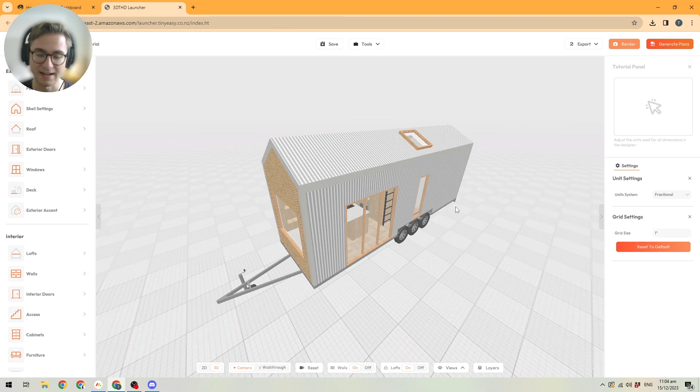You can manage your account here, and you will find design settings. So for example, design settings will help you if you are in a design that's designed in the metric system, but you want to change the project over to an imperial system. You can go into the unit system here, and you can choose between millimeters, centimeters, meters, inches, feet, and fractional.

As a quick tip, the fractional system is inches and feet combined, so you can type in, let's say, 1 foot, 1 inch, and a quarter or something like that together. I'm going to leave it at fractional for now, because we are already using an imperial design here.

And then you have the preference settings here, and you will find the UI preferences and the save preferences. With the UI preferences, if you are on a small screen, this will be your friend. Let's say you have loaded the design and you think your interface is quite small. You can go in here and change the page zoom to make the software bigger. So the buttons and all of the interface will get bigger, so it's easier for you to see.

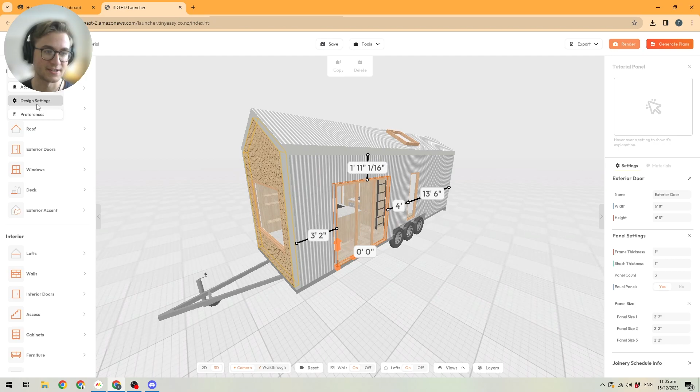The 3D dimensions and 2D dimensions can be changed here as well, so I'll just quickly show you what those are. In this case here you can see the 3D dimensions popping up around an object. You can change the size of this to fit your screen size. I like keeping this myself at around 120%, because I have a larger screen, so it's easier for me to see. And the 2D dimensions are the dimensions that pop up when you are in the 2D view, and I will get into the view in a second.

So that's the preferences. The next part of the top bar here, you will see the license. I'm currently in the business version, but if you're on a trial or in the personal version, you will see that up here. Here you will see the name of your design that you've currently loaded. And this is the save button, the most important button that you will be using a lot to make sure that you don't lose your progress.

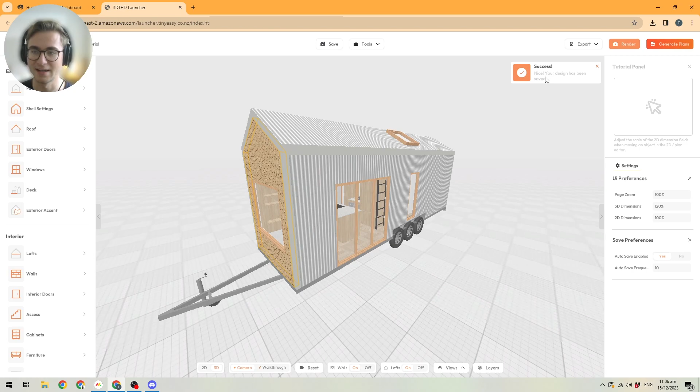You just click the save button here, and you will see a notification pop up that your design has been saved. We also have autosave, which is automatically enabled and saves your design every 10 minutes, and you can change how often you want to save your design here.

Then we have the tools, which I will go into in a second as well, but you can find your tape measure and other tools to modify your design quickly in here. And here we have the export tools. These are the tools for when you're finished with your design and you want to create plans, generate renders, so realistic images, create a takeoff, or convert your design to a SketchUp model. You will find this up here, and we have a separate tutorial on each of these tools as well.

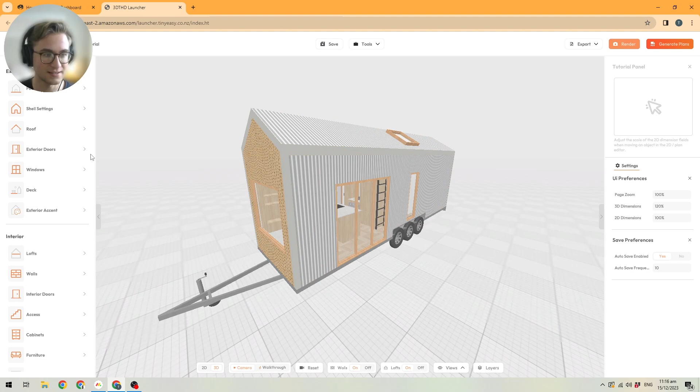On the left you have the library bar. The library bar is where you will find all of your objects and settings to modify your tiny house. So the exterior settings are for changing your exterior. So you will find settings like the foundation or trailer settings. Then the settings to change your shell, so your exterior walls and wall thickness, and also the total height of your tiny house. The roof, which changes the look and configuration of your roof.

Your exterior doors and windows, which are self-explanatory. Your deck to add an exterior area to your tiny house. Your exterior accents to add materials that only cover part of your exterior. And then you have your interior section. So when you're done planning your exterior, you can easily move on to the next part basically, and it's just grouped into different categories to keep things simple.

And the interior has tools like the lofts, interior walls, the interior doors, stairs and ladders, cabinets to plan your kitchens and bathrooms and bedrooms, your furniture to place more regular furniture objects, interior accents to place, let's say, floor materials in only specific areas or add splashbacks.

And then you have your technical tools like your lighting and electrical to plan your lighting and electrical, which also goes into the electrical plan later on. The plumbing to plan your plumbing and also your plumbing plan, and then room tags to be able to go into more details in your plans. So we'll cover each of these tools in a separate tutorial, but this is where you can find them.

And if you don't want to have your library bar open all the time, you can actually click this little collapse button here, which will collapse it to a smaller menu. So if you actually know what all of these buttons do, you can save yourself some screen space. But when you're getting started, there's some good little hints here to tell you what's what.

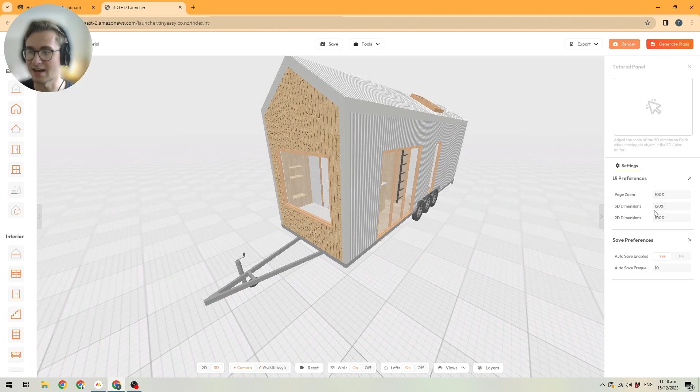And then let's move on to the right side, which is our settings panel. So this settings panel is used whenever you select an object, and you will see their settings come up. So let's say I will select this oven cabinet here, and I will also show you how to move in the software and select objects properly. But just to show you how the settings work, you will see the settings pop up here on the right, and you will find particular settings for that specific object.

So you will see the settings for this cabinet, and then you can also see this other panel here pop up, which is the tutorial panel. So when you actually hover over an object setting, you will see specific pictures come up that explain what that setting does, and you will see them pop up in the tutorial panel up there together with a description of how that setting works as well. So if you don't know what setting modifies what, you can look into that to give you a good reference of how that works. So that is the tutorial panel and the settings panel.

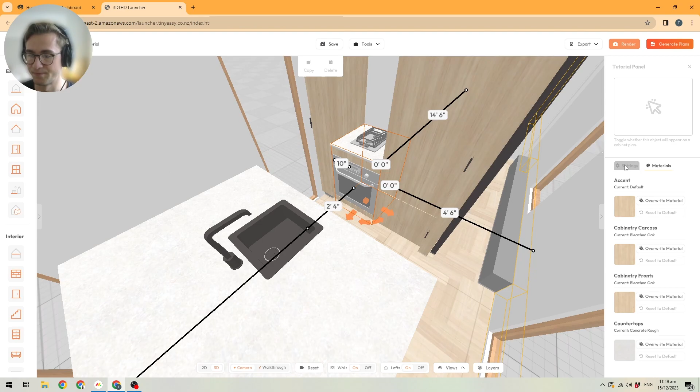Usually you can also change materials for objects by clicking into the materials object here, but I'll also go back into that in a little bit. And the last part of the interface is the view bar. So down here you will have settings that will change everything about your view. So let's say if you want to switch into 2D mode, that is down here. You can switch between different cameras, reset your camera.

You can enable and disable walls. You can enable and disable lofts as well. And you can change which layers are toggled on. So you can, let's say, see cabinets, not see cabinets, see your dimensions or not see those dimensions. Your plumbing and room tags, you can enable and disable them in here as well.

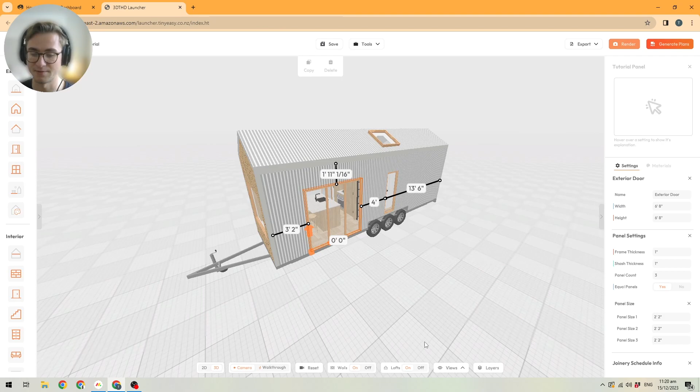And the last part are the layers, which I will also cover later on in the best use cases for them. But you can toggle which objects are selectable. So let's say your walls, lofts, roofs. If you disable those, you don't accidentally select those anymore, and you can just select, let's say, your windows. But I'll cover that later as well. So that's the interface. One other thing here, you also have your copy and delete button up here when you have an object selected.